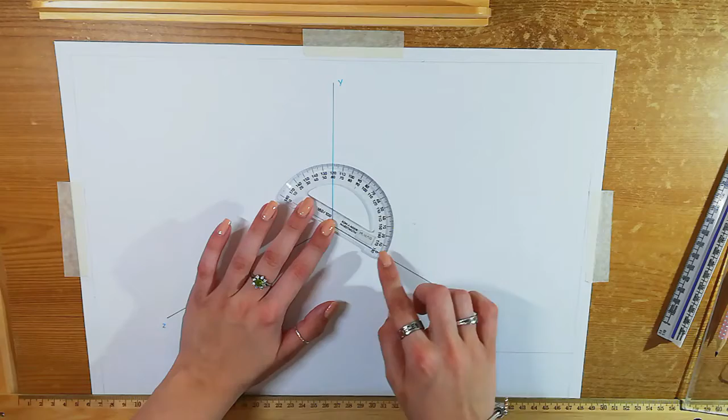I am now going to write down the axis, which is the X, Y, and Z. So I'm just going to mark these, X, Y, and Z. There we go. That is the axis. Now, if you measure it using a protractor, you will notice that all of the angles are 120 degrees, 120 degrees, and again, 120 degrees. All 120 equally.

Now we need to construct the axonometric plane. So first of all, we have to draw a triangle. I'm going to draw a line coming down here. Doesn't matter what length, what size. This is like the perfect size. It's not too small, so we have some area to work with.

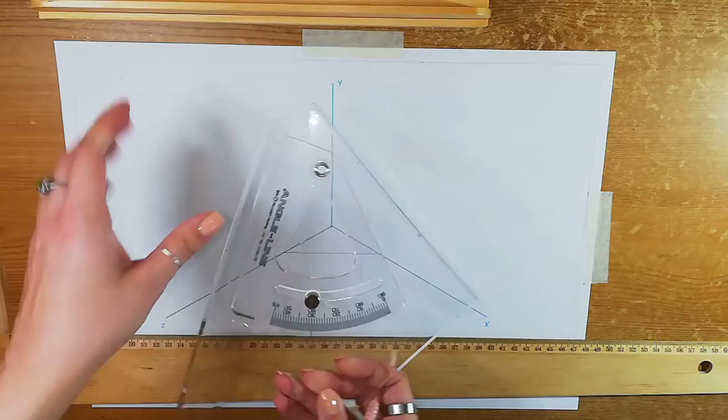Not too big, perfect. Now, we take our set square, and using the 60 side, this side, or if you're using a regular one, this side, we draw a line from where the triangle ended there on that line here, up. And then we do the same with the other side. So we bring that up there. There we go.

Now, using the 30 side, which we used to draw these blue lines, if you bring those out, like so here, you can see that this line is perpendicular to that line, creating a 90-degree angle. If you do the same here, you will also notice that it is perpendicular. The same over here. They're all perpendicular. They have to be. So if they're not perpendicular, you've done something wrong and you need to retry.

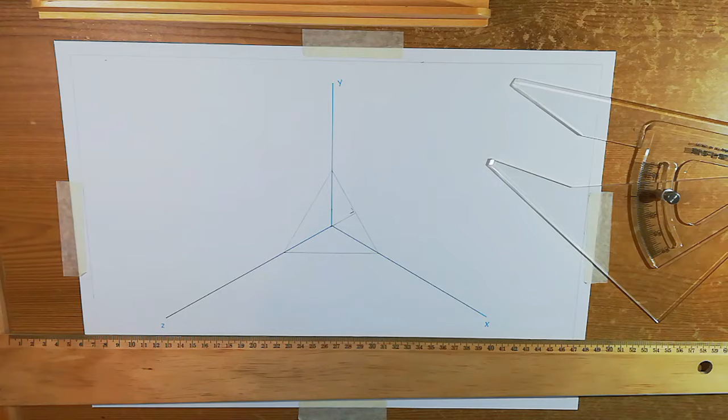So now that they are perpendicular, we will be rotating the triangular vertical plane to see the true shape. What that means is basically using the 30 side, which is this side on that ruler, see this line? We will be drawing 2 more lines parallel to it. So from this end of the triangle, we bring that out. And from this end of the triangle, we bring that out.

There we go. Now, using the 60 side, which we used to draw this, we're going to draw a parallel line to this here. Somewhere like here. Again, it doesn't matter what length these are. Just don't go too far off the page. That's the most important part.

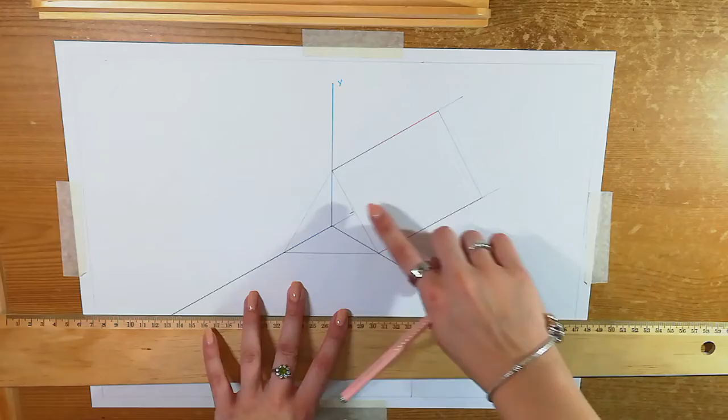So now that we have that, we have this line. I will quickly just draw these in using a pink marker. Now we have these lines done. Next thing is we have to bisect this line, meaning we have to find the middle, what half of it is. You can do that with a ruler, or you can also simply do it with a compass.

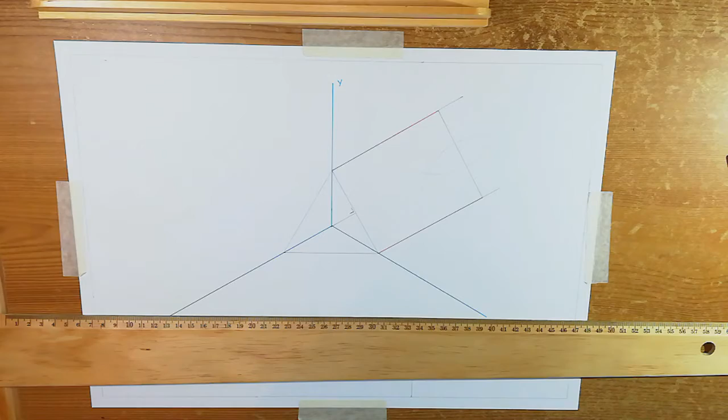So you take your compass and you make an arc. Doesn't matter, as long as it looks like it's more than half. And you make an arc like that. Then you bring the needle to the other side and do an arc like that. Now, where these 2 arcs join, over here, we connect this dot with that dot to where the 2 arcs join, and we get a line. Here is where the middle is of this line.

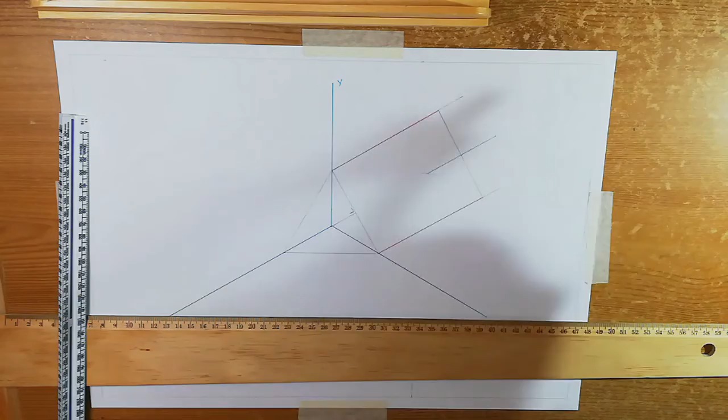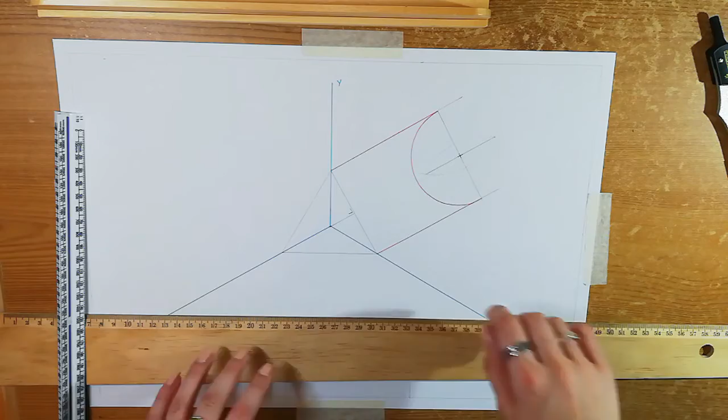So now that we have the middle, we will put the needle in the middle and we draw a semicircle, just like that. There we go. I will quickly make this semicircle pink so it's more visible. Okay, so now that we have the semicircle, we are going to take our set square, and using the 30 side, which we used for these lines, we are going to bring this line out further until it hits our semicircle.

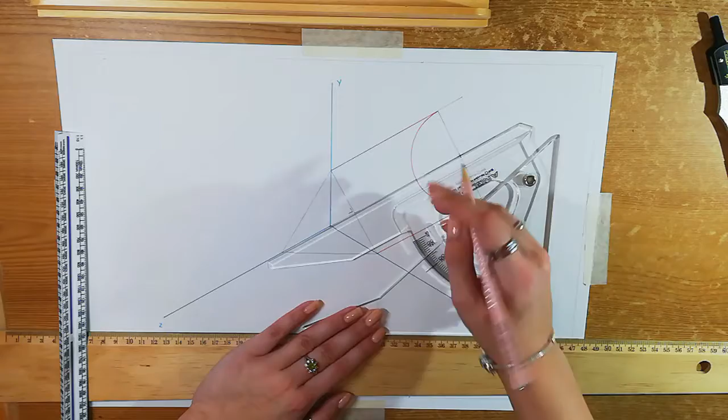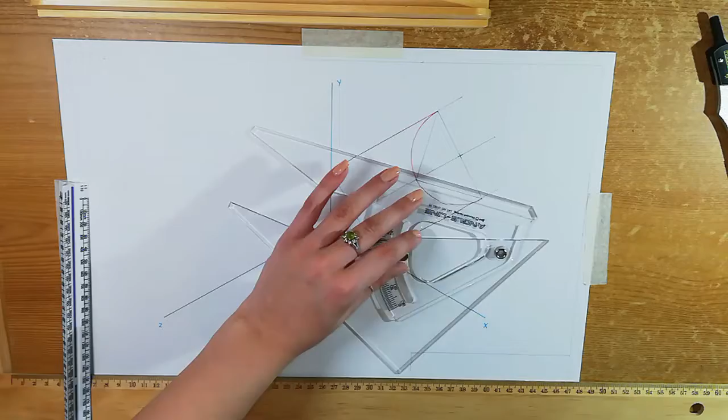Now see this point where it hits the semicircle? Now, that point we join to this corner where the semicircle starts, and we join it to this point, like that. Now I will quickly go over this in a blue marker so you can see it better. Now we have these 2 blue lines. On these 2 blue lines is where we're going to draw the elevation.

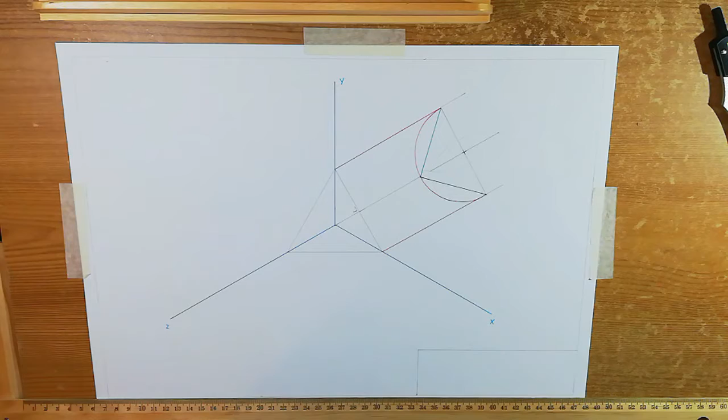So the elevation is going to go here, and the plan of the cuboid is going to go here. So the elevation, looking straight forward at the cuboid, is going to be a rectangle, and the plan, which is looking right above the cuboid, is going to be a square, and it's going to be here. So now we have to do the same thing we did here over here. So I will quickly speed through this process and not talk much. It's basically the same principle.

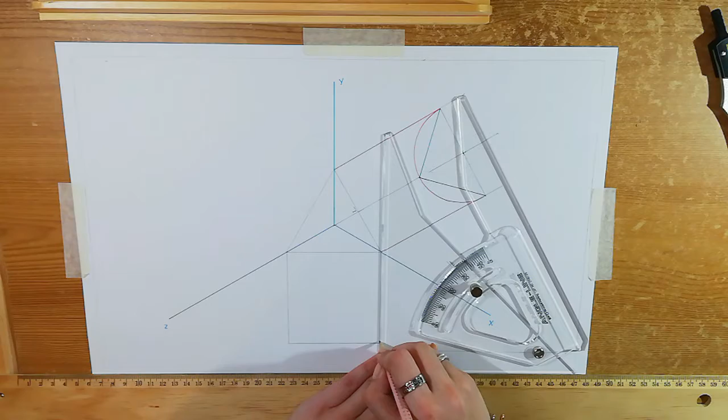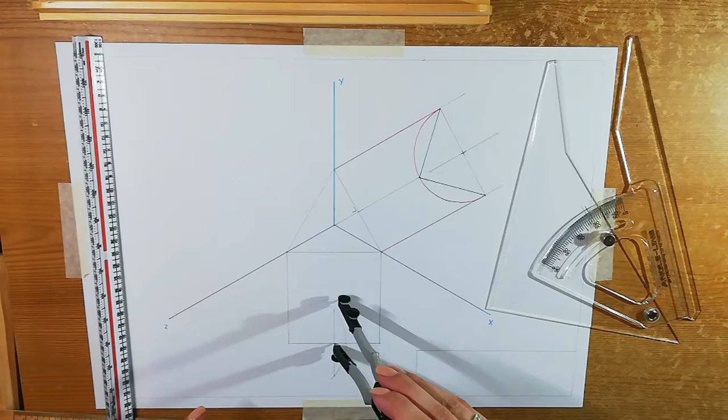You just bring the lines down. Join them together. Then we find the middle, draw the arc. Bring this down to the arc and connect this to there and this to there. Okay, so I am done now doing this, the same here and here.

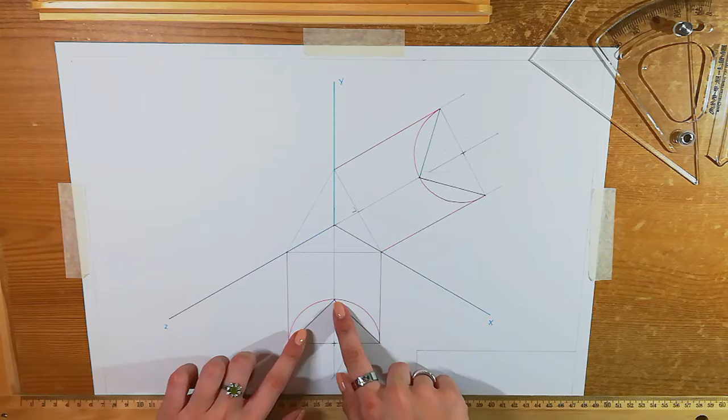So now on these blue lines, we're going to draw the plan here and the elevation will be here. So let's do the plan first of the cuboid, which is going to be a square. So let's say the square is 50 millimeters by 50 millimeters. We take our ruler and we measure 50 millimeters, which is going to be here. And we measure 50 millimeters over here.

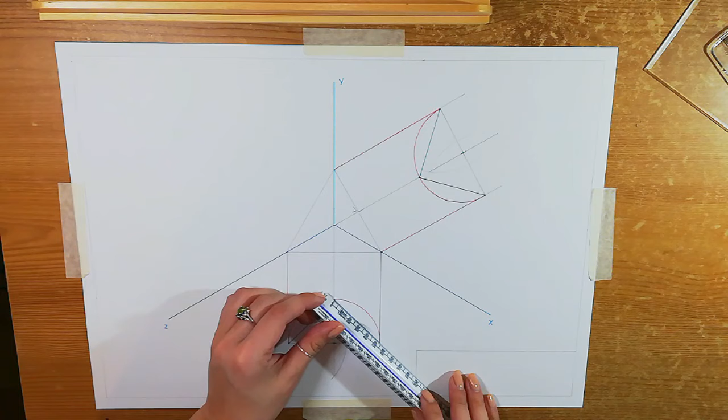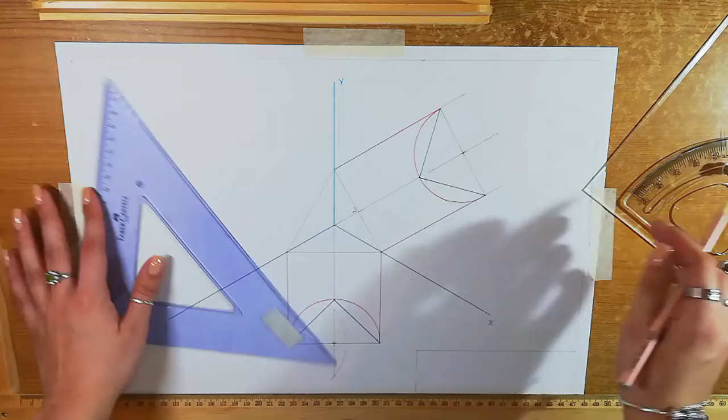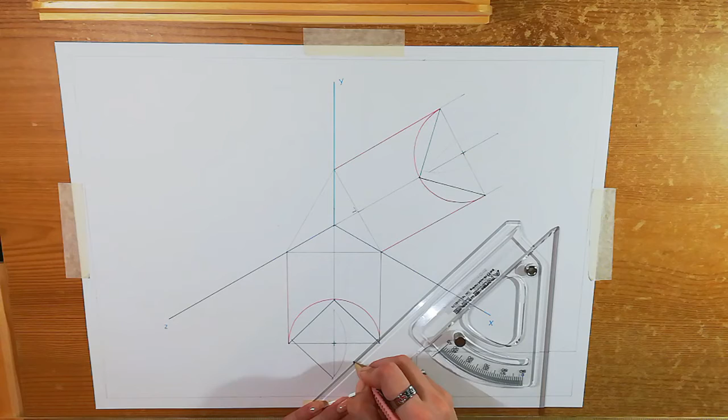Now, we take our set square and we loosen it up and we put it back to 45 degrees. Or if you're using the standard ones, you just take this set square that is 90, 45, 45, like that. I am using the adjustable one, so I'll be using this. Now, with any side, you draw a line going like this here. And now the same over here from where you marked off the 50. Just join that up. And there you have it. That is your square in the plan.

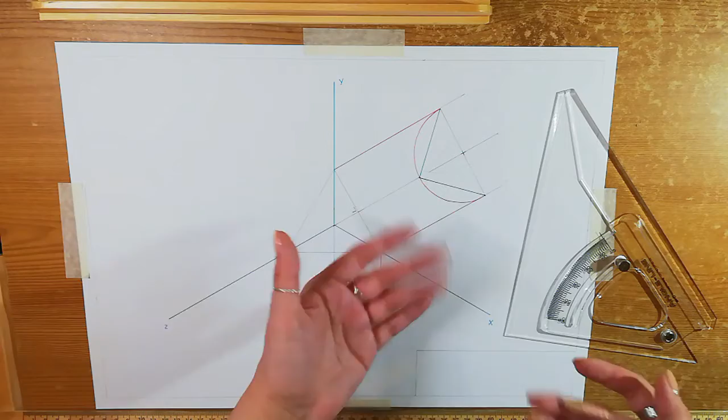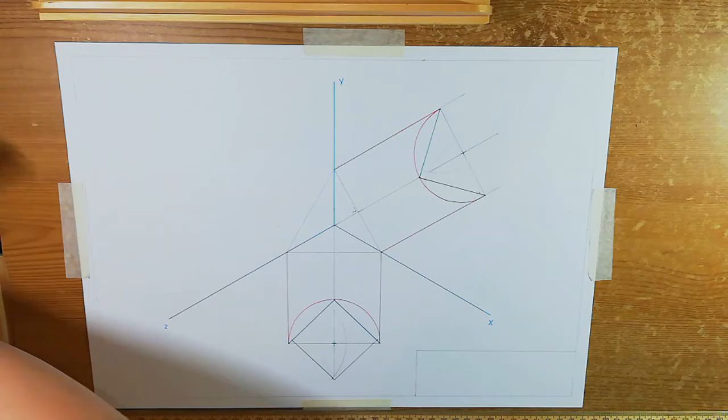That plan is done. Now we need to do the elevation, which is going to be a rectangle for the cuboid, and we are going to draw that here. So the base of the rectangle is 50 again. So we measure 50 over here. That's 50. And now we measure 100 over here. My ruler is too big to fit there, so I'm going to measure it like this.

There we go. And it's okay if it goes past the blue line. We're using the blue line as a guideline. So it goes past the border a little, but it's okay. No panic. As long as it's on the page, it's fine. So there is 10. There is 5.

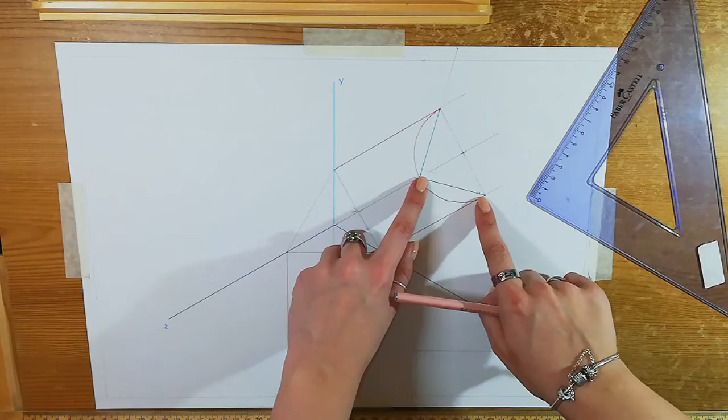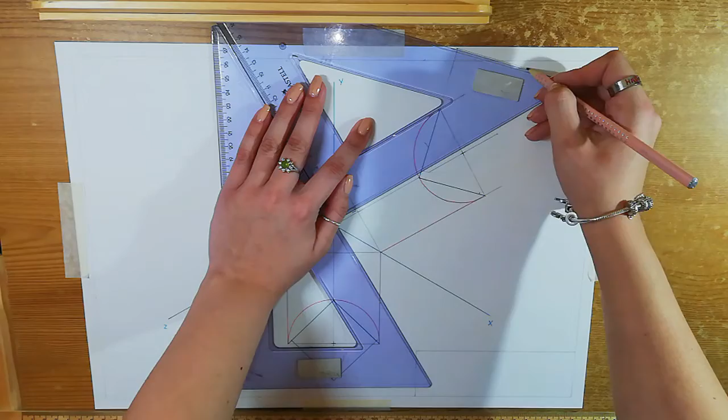Now, using the sliding set square method, you can use a ruler, or simply you line up your ruler edge with the line here. And now you put your ruler here and you simply slide this until it reaches the little mark you made. And you draw a line like this. That is parallel to this.

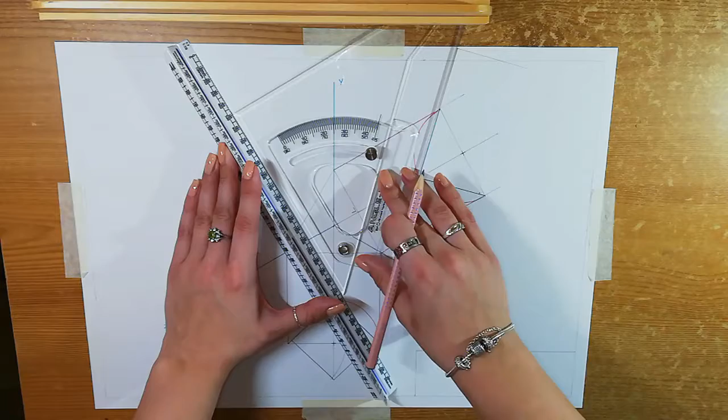If you do not have the standard set squares, you can simply do this. You line up with the line there. You take your ruler. I'll move the T-square for a second. You put the ruler like this and, wait, line it up here like that. Perfectly. Put the ruler here and we slide until we get to the little mark there, and we draw the line. I'm just going to extend this a little bit more.

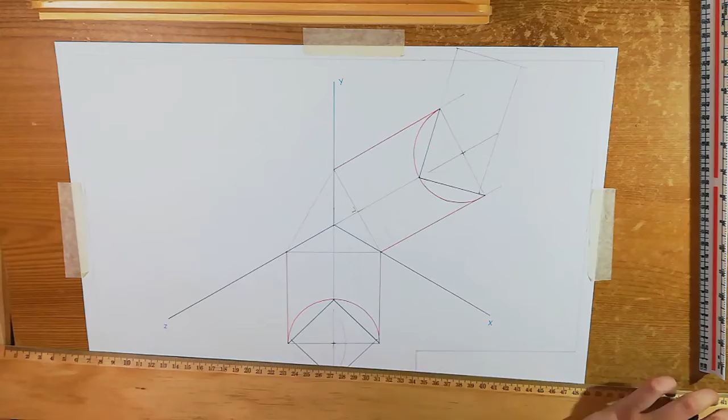Like so. And there you go. There is your elevation of a rectangle. Now, it's very simple. You just put your T-square back and make this again, loosen it up and align the line with the 30-60. So there we go, tighten this.

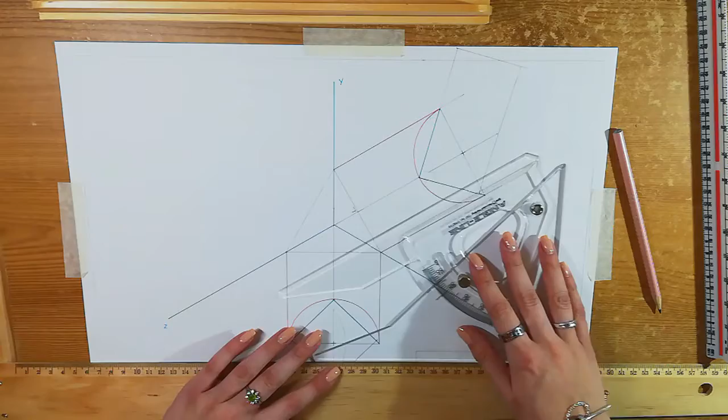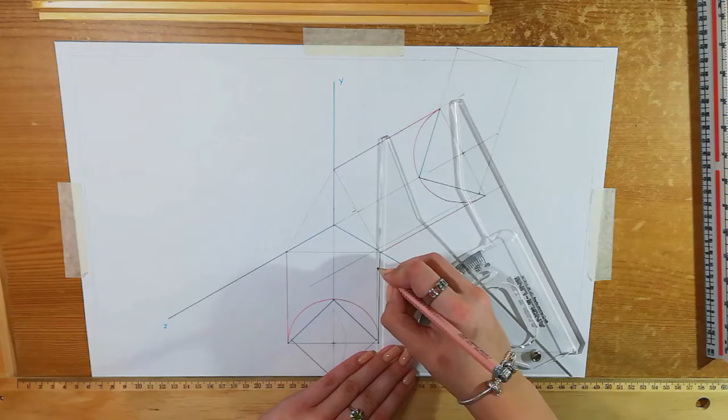And if you're using standard ones, then you just take this ruler. And now using the 30 side, so this side on the standard one, the side you use to draw these lines, we bring this corner of the rectangle up here. Now, if you bring this corner up, that will join the rectangle line here.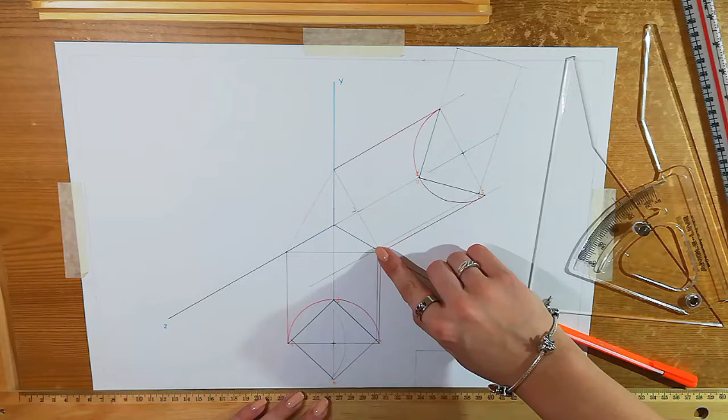So I'm gonna take an orange marker and I'll label these corners A, B, C, and D. So let's say A is here and B is here, and C and D are also going to be here, but they're at the back. So C would be also here as this point, and D would also be on this point, but just at the back. So now when you join C here to C here, you get the point C.

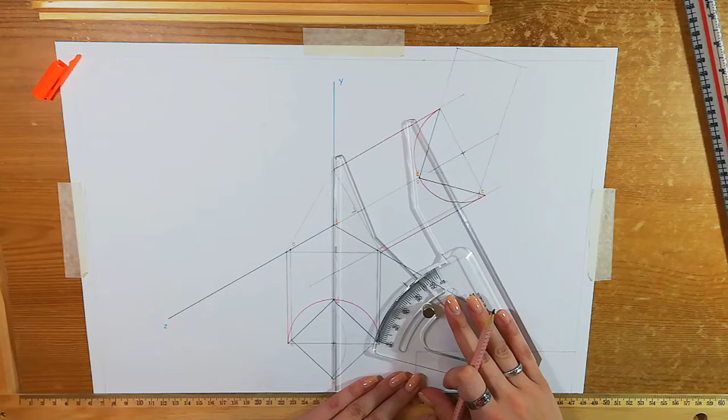Now D is already brought up for you, and D is here brought up, so that point is going to be D. You bring the A up like so, and that A is brought up here, so this point is going to be A. And now the B, we bring that up, and this is already brought up from B. This point here is going to be B.

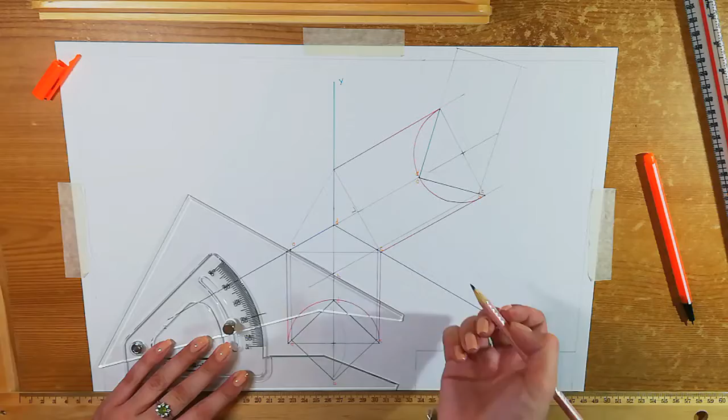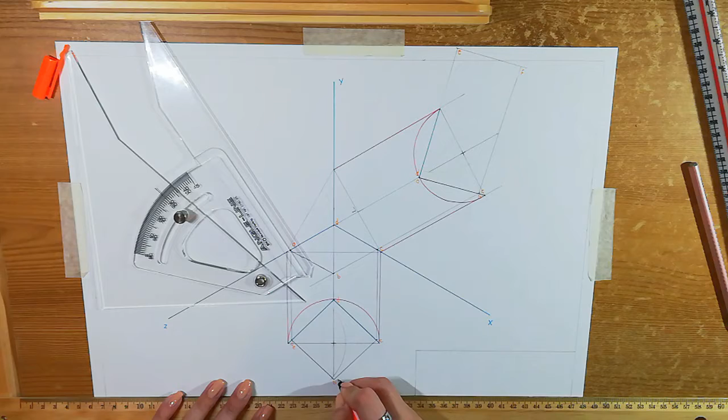And now we just join these together. These are already joined, so just join this together and boom, we got the base of the cuboid. Now we bring the line A up, and so we have here ABCD. So now let's label this E at the top and F at the top, G here and H at the top here. So then G would also be here but at the back, and H would be here but at the back as well.

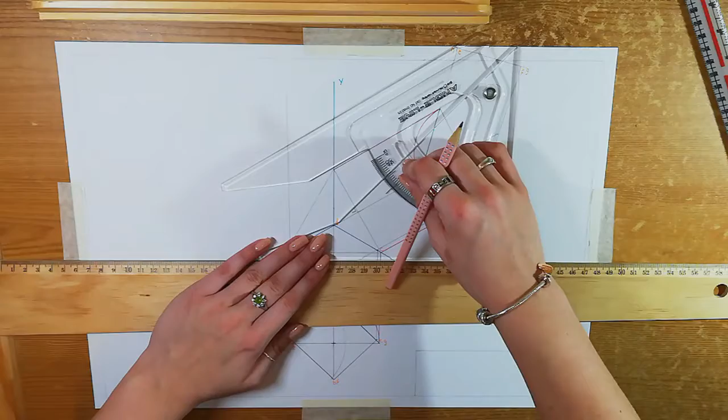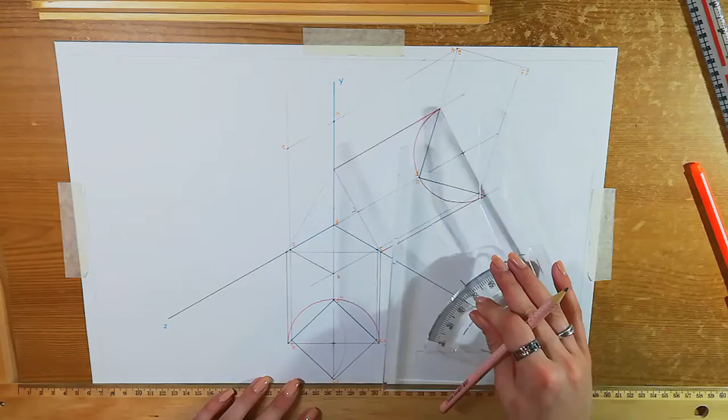So now we do the same. We just bring E up. So we continue this line up. And where is E? We bring that up here. And that's our E point over here. Now H is on this line, and we have brought this line already, so that is already our point H. Now we bring out F, already brought up on this line, so we just bring F from here. There we go, that is F.

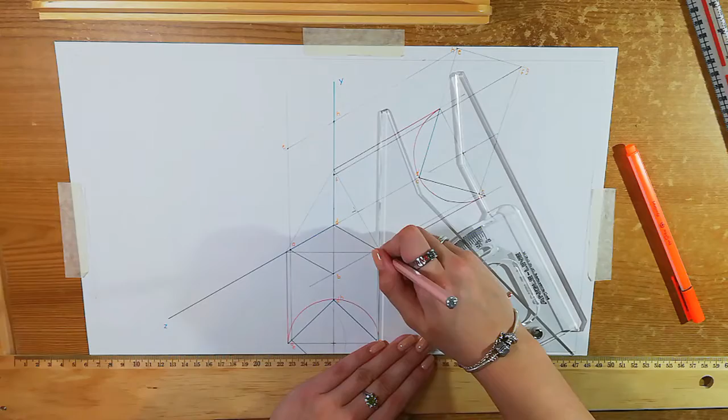And now we bring up G from here, and where it meets G here, that is our point G. Now we connect these points together. There we go. And we got our cuboid.

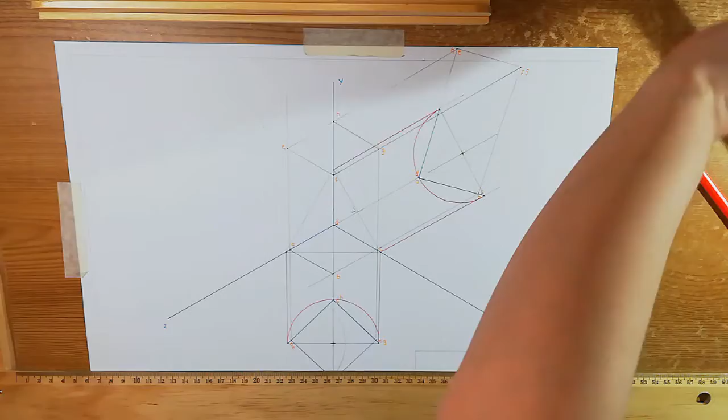As you can see, it's very hard to see, so that's why I am going to go over it with a fine liner in 0.5. It doesn't matter what, I'm just going to go over it with black fine liner, just so you can see it better. So first of all, I'm going to go over the top, because you can see the top no matter what. So we have a line here, a line here, over here, and here. There we go.

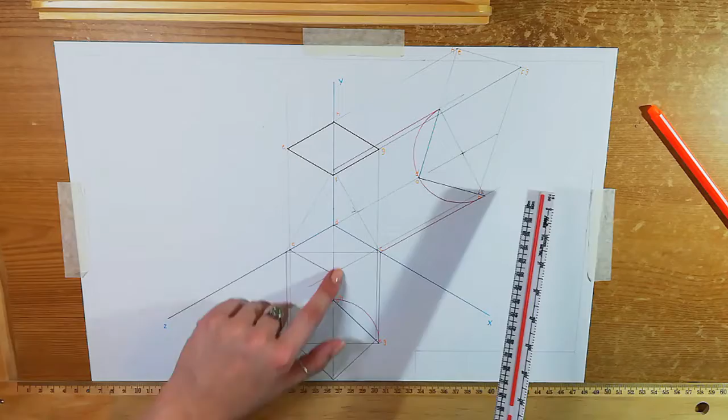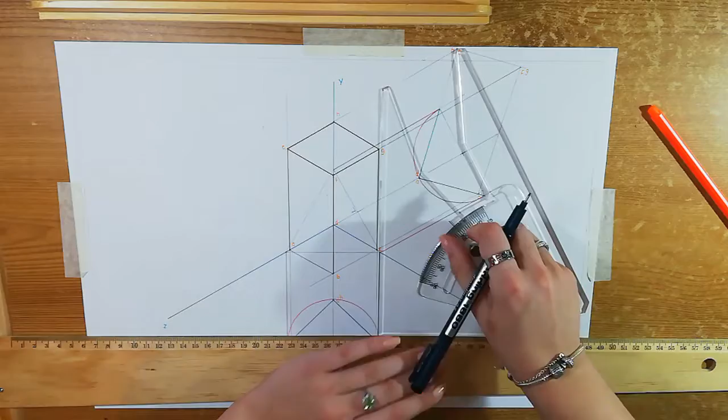Now we can see the lines going down here. So basically, I'm just gonna use this, it's easier. So I'm just gonna bring this line down to A, this line down, and this line down from G to C. Now, I'm going to bring these lines across because you can see them, and this line across.

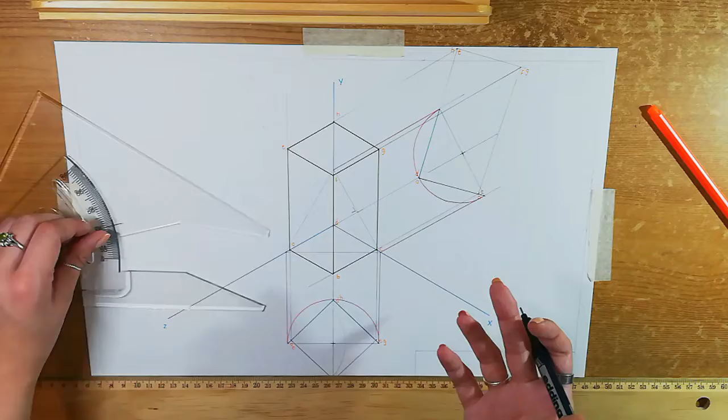And now these lines, yes, they are important, but you cannot see them because it's a solid. So if you want, you can draw in dashed lines which indicate that on the other side, even though we can't see it, there are lines there. So we just draw dashes like so. This indicates that there is a line there, that they are connected. We just cannot see it because it's not in our view. The same for over here at the top. Dashed lines for the line that goes from D to H. And there you go. That is simply done.

There is your cuboid. This was the plan. This was the elevation. And there is the axonometric view of the cuboid.